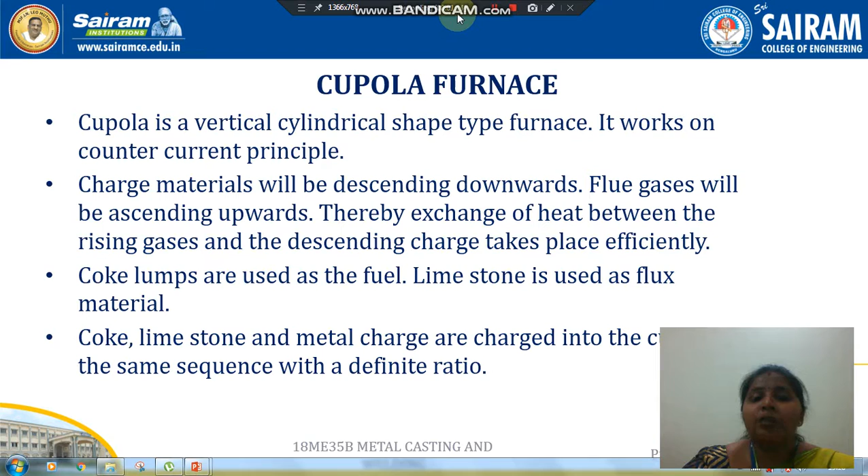Coke lumps are used as a fuel. Limestone is used as a flux material. So coke, limestone and a metal charge are charged into the cupola in the same sequence with a definite ratio.

Once the process is started, the coke is ignited and the blower is blown to produce more heat. This produces heat for the raw materials to be heated, and there is a slag port through which the slag is taken out after the raw material is melted into molten metal.

So there are different types of zones: stack zone, preheating zone, melting zone and the reducing zone. Also there is a combustion zone, and here there is a molten metal hole, a door, column, and foundation. Since it is a very large structure, the foundation should be very strong to support the entire length, and this is lined up with refractory materials.

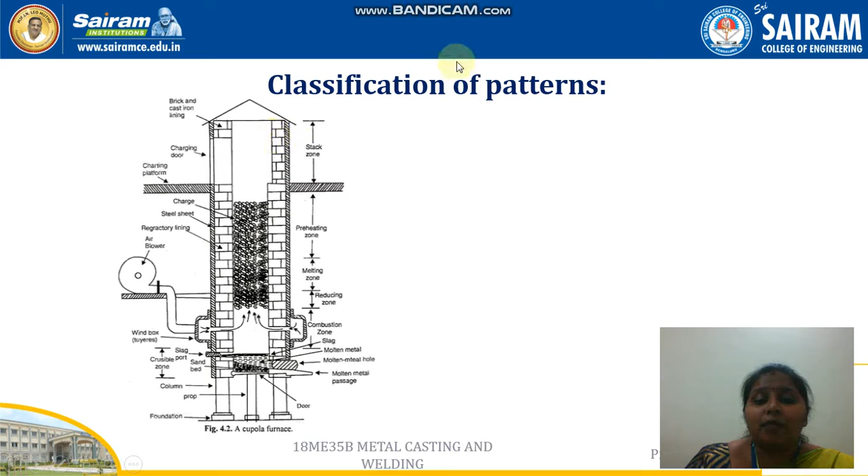So the next topic is zones in cupola. We saw different types of zones in cupola. There are 4 different zones: well zone, combustion zone, reduction zone and preheating zone. It starts with the well zone at the bottom. It is a portion situated between the rammed sand at the bottom and just below the bottom edge of the tuyeres. The molten metal is occupied in this zone.

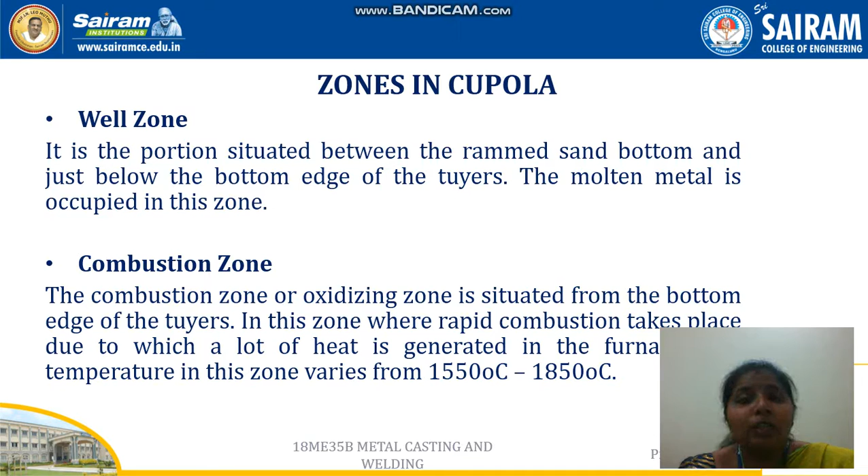This is the bottommost zone where the molten metal is occupied, and next comes the combustion zone. The combustion zone or oxidizing zone is situated from the bottom edge of the tuyeres. In this zone rapid combustion takes place, due to which a lot of heat is generated in the furnace. The temperature of this zone usually varies from 1550 degrees Celsius to 1850 degrees Celsius.

The reduction zone or protection zone is a portion located from the top of the combustion zone to the top of the coke bed. In this zone, some of the hot CO2 gas moving upward through the hot coke gets reduced to carbon monoxide. In other words, the reduction of CO2 to CO occurs in this zone. Due to the reduction, temperature reduces to 1200 degrees Celsius in this zone.

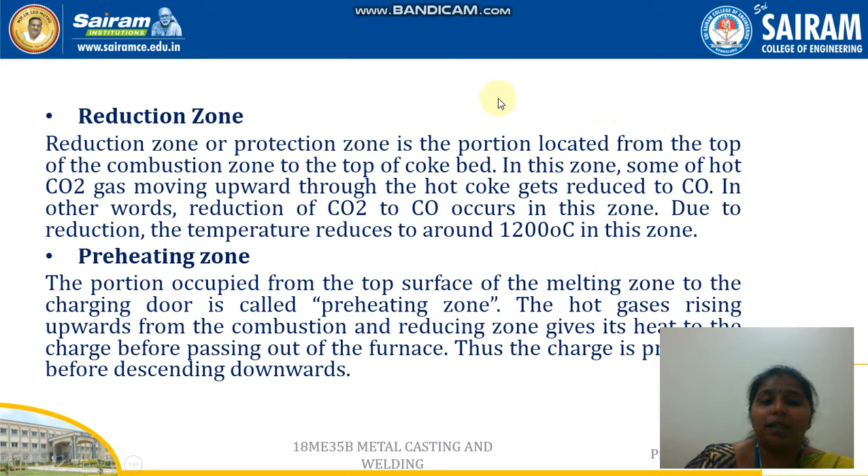Next comes the preheating zone, which is the topmost part of the cupola furnace. The portion from the top of the melting zone to the charging door is called the preheating zone. The hot gases rising upward from the combustion and reducing zones give heat to the charge before it descends, thus preheating the charge before it moves downward. So this is about the different zones in the cupola furnace.

Now we can see a video about the cupola furnace.

For many years, the cupola was the primary method of melting used in iron foundries. The cupola furnace has several unique characteristics responsible for its widespread use as a melting unit for cast iron, making it best suited for melting cast iron. The characteristics are as follows.

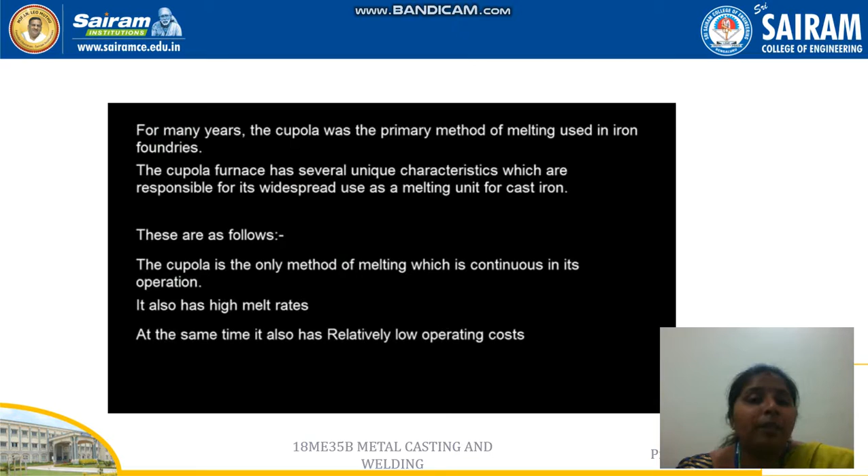The cupola is the only method which is continuous in operation. It also has a high melt rate, meaning it can quickly melt the raw material, and at the same time it has relatively low operating cost. It enables ease of operation, as the operation is very simple.

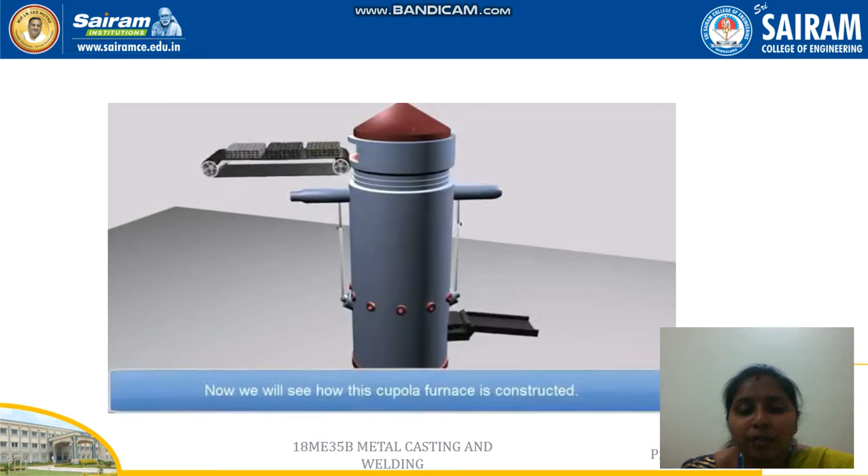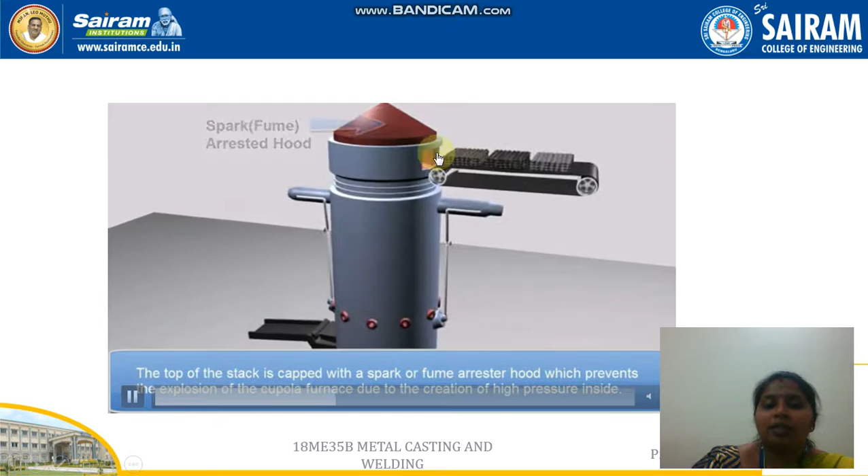This is the cupola furnace, and this is how it is constructed. You can see the charging door here at the topmost part, through which the charge is placed inside the cupola. This includes coke and limestone.

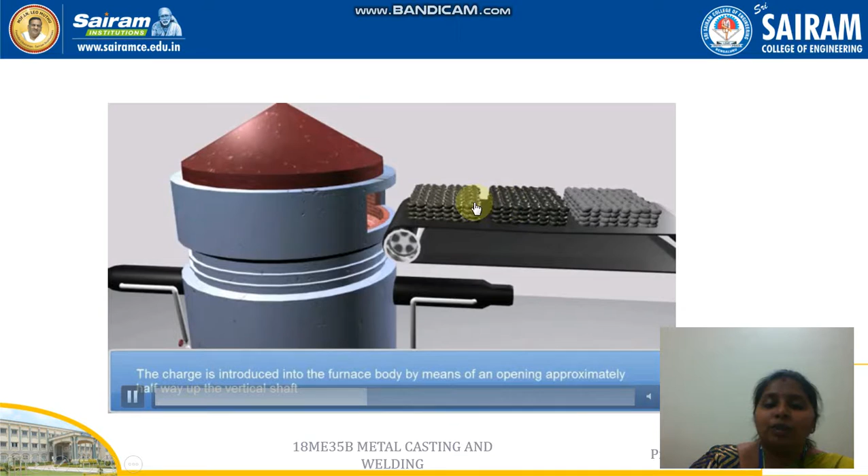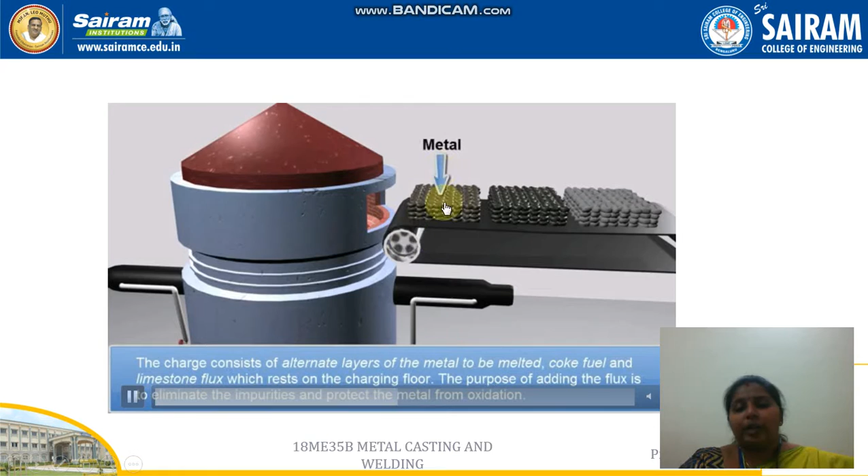This is passed through an elevator into the cupola furnace. Here you can see the cupola furnace is lined with a refractory material, and coke, the metal to be melted, fuel, and limestone as a flux are placed inside the cupola furnace through the charging door.

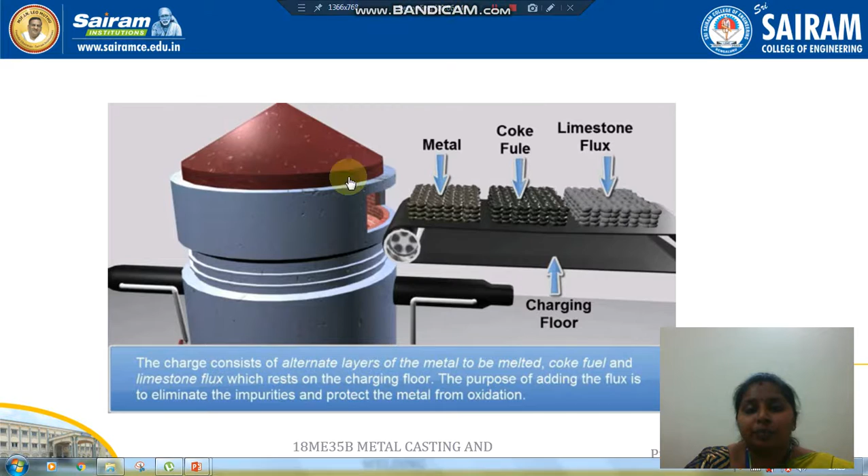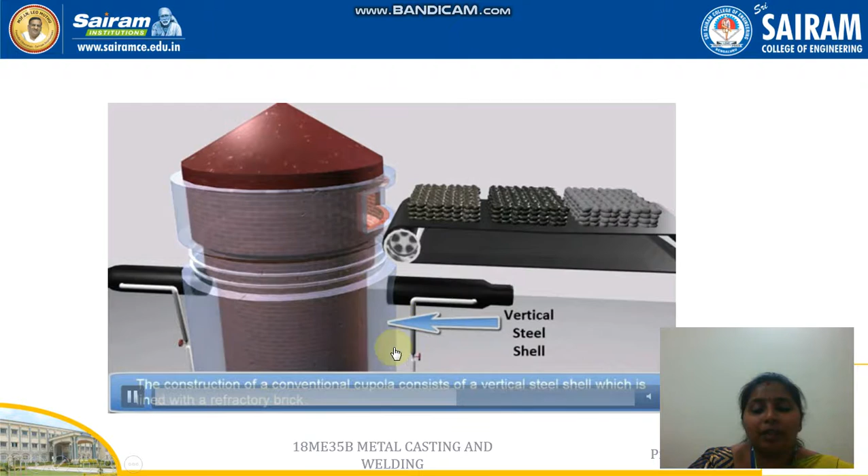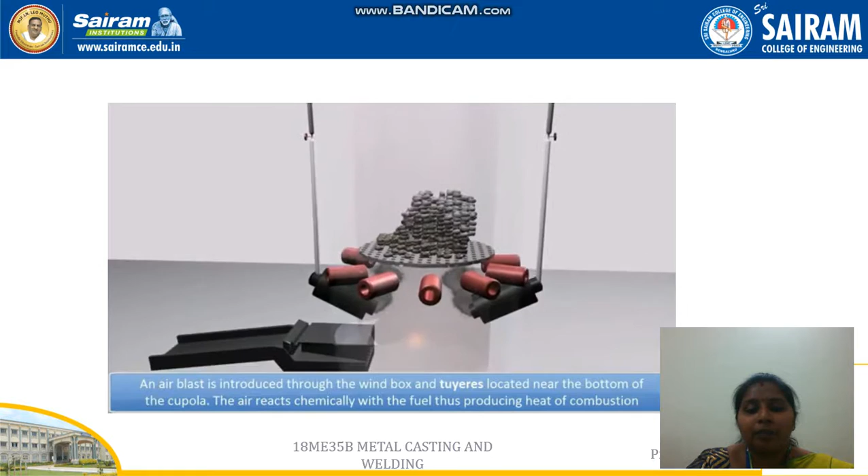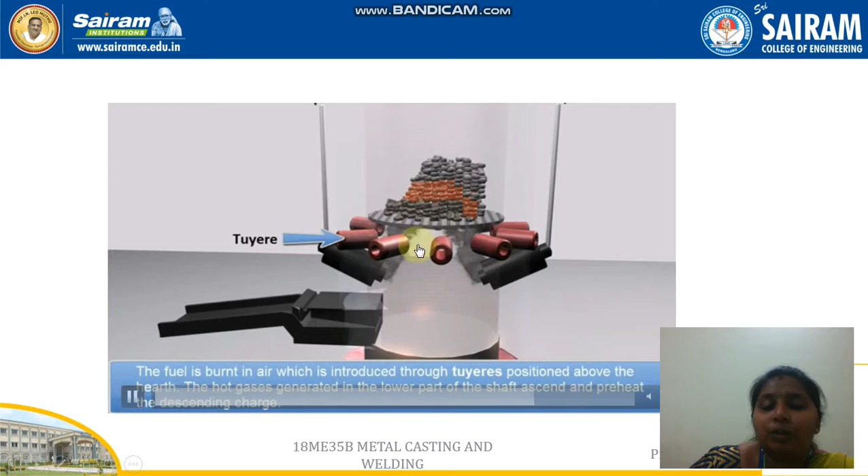The purpose is to prevent the oxidation. This is made with a vertical steel shell inside which is a refractory brick. Now you can see it is placed layer by layer, and these are the tuyeres through which the air blast is given so that the coke gets ignited due to the heat.

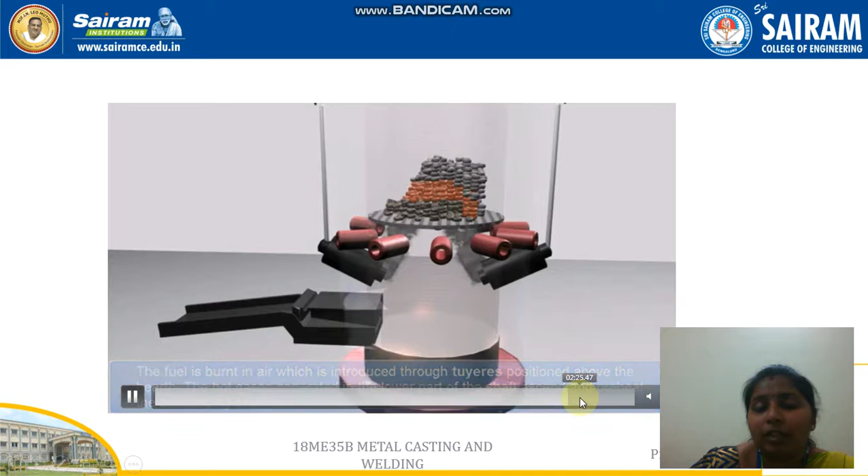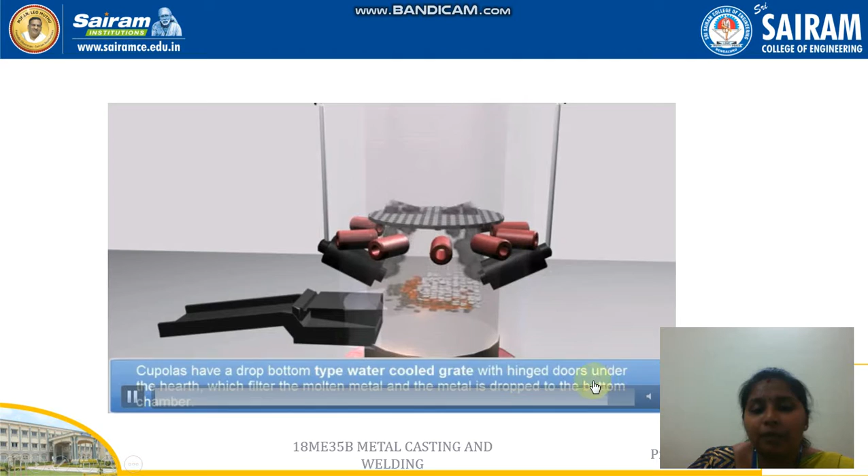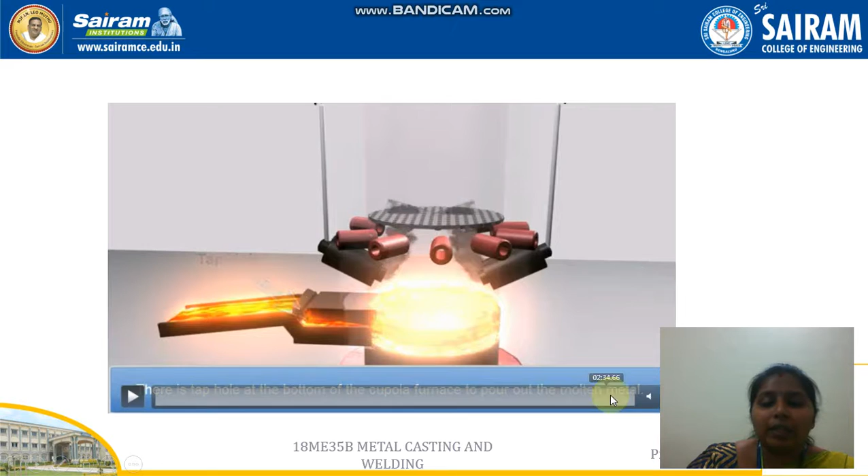So this is the construction of a cupola furnace, and this video shows how the melting takes place inside the furnace.

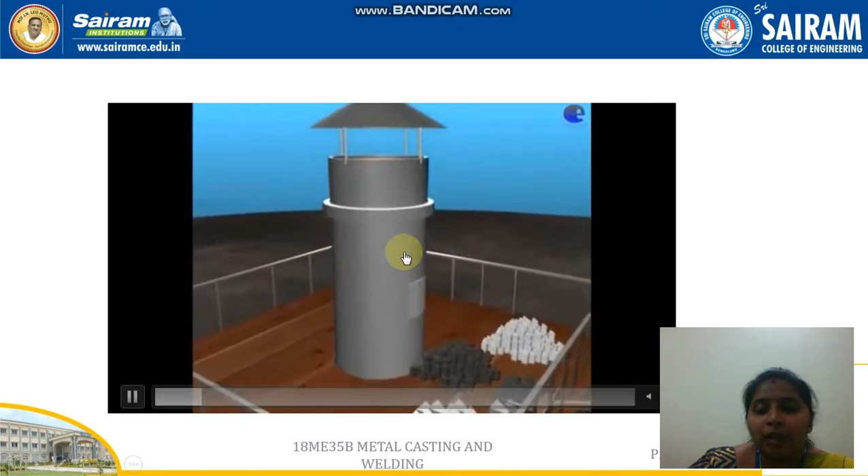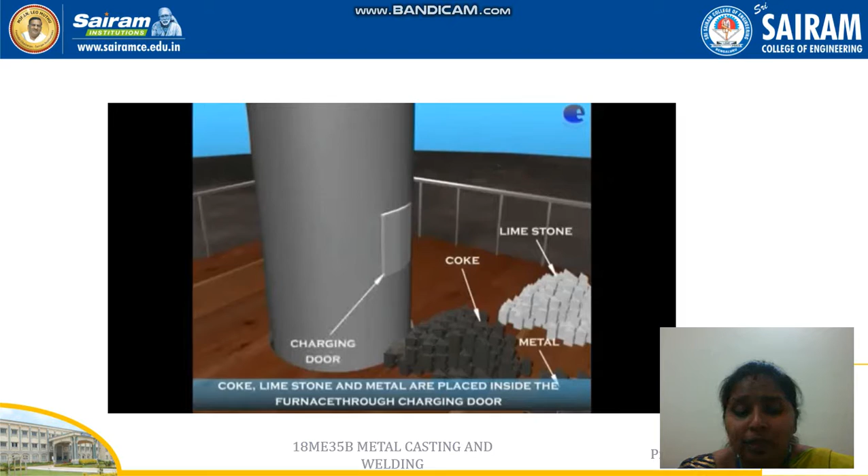So this is the cupola furnace, and through the charging door we are placing the limestone material, coke, and the raw material to be melted, the cast iron—everything is placed inside this charging door.

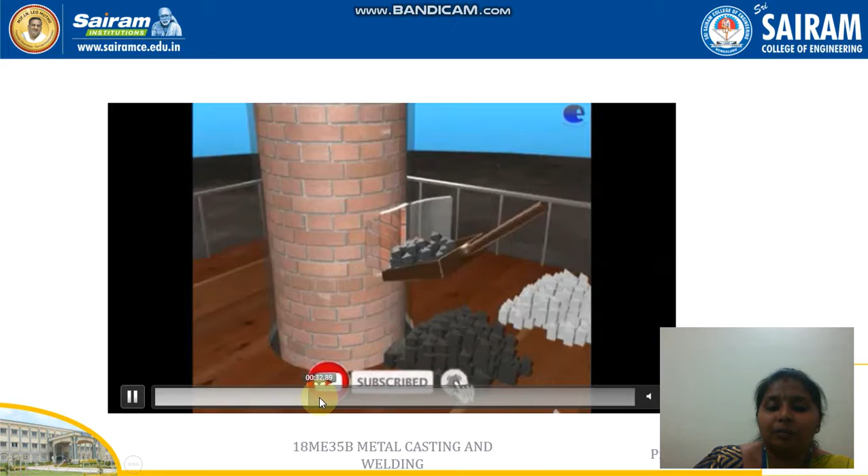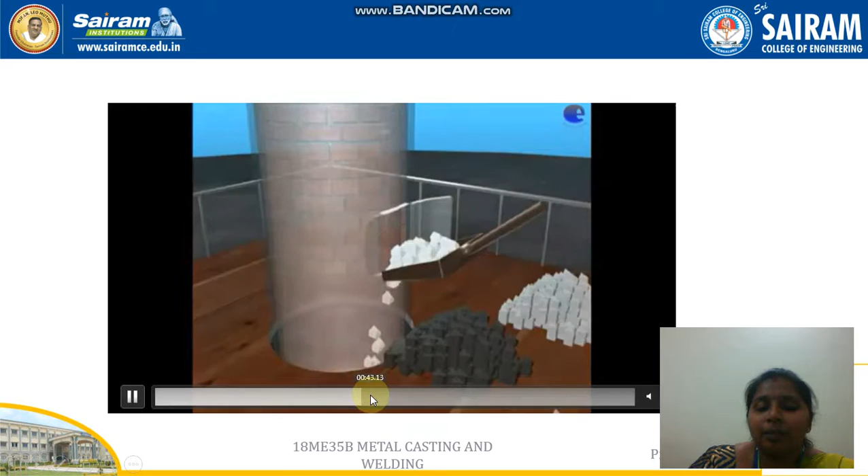Once the raw material, coke, and limestone are placed, the coke is ignited because it acts as a fuel, so it gets ignited easily with the help of the air blower.

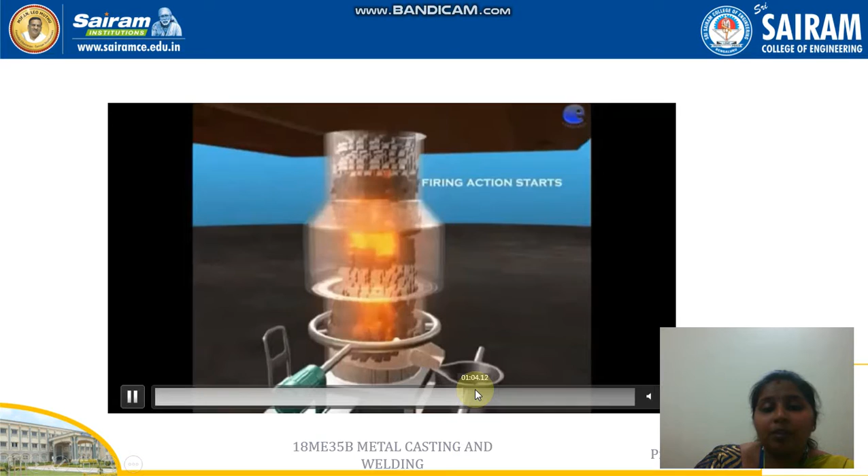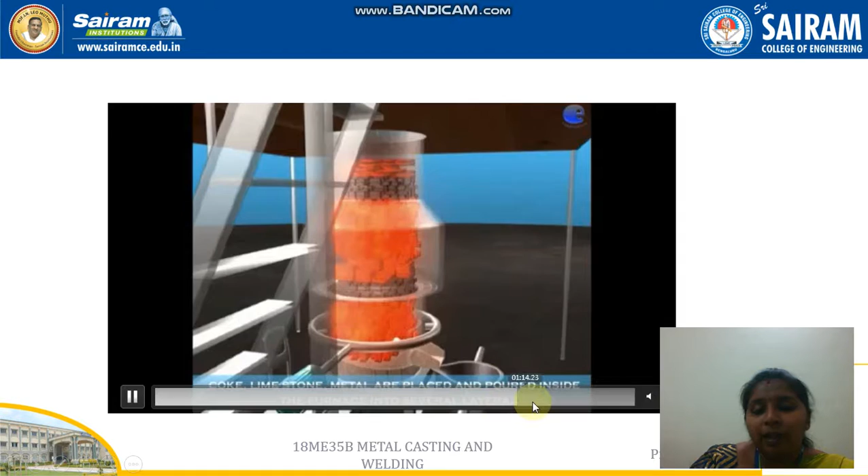So once everything is placed and the coke is ignited, the heating takes place which melts the raw material. This red is nothing but the raw material getting melted, which is the cast iron. Once the melting process is completed, it is collected in the ladle. This is how the molten metal is collected.

So this is about the construction and the different zones and working of a cupola furnace. Thank you.